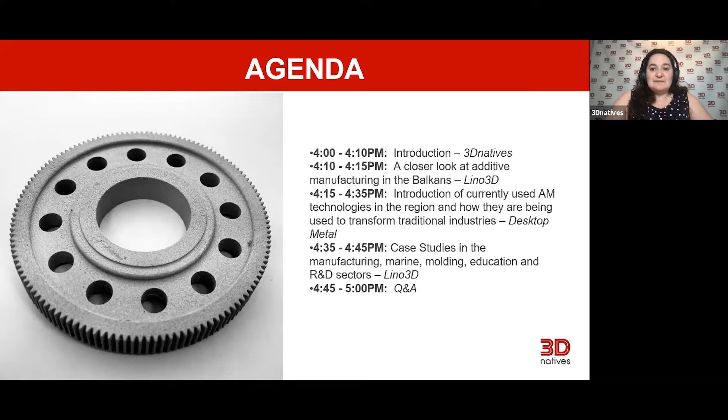So let's go to the next slide. For those of you who don't know, there can be some disagreement about which countries are considered Balkan. The general consensus right now is that it is made up of Albania, Bosnia and Herzegovina, Bulgaria, Croatia, Kosovo, Montenegro, North Macedonia, Romania, Serbia, and Slovenia, as well as Greece and Turkey. This is what we refer to as the Balkans region, also sometimes as Southeast Europe. You'll hear both used interchangeably.

Traditionally, industry in the Balkans has been centered around sectors like manufacturing and the maritime sector, unsurprisingly. Though, of course, that's not exhaustive - there are quite a lot of sectors in the area.

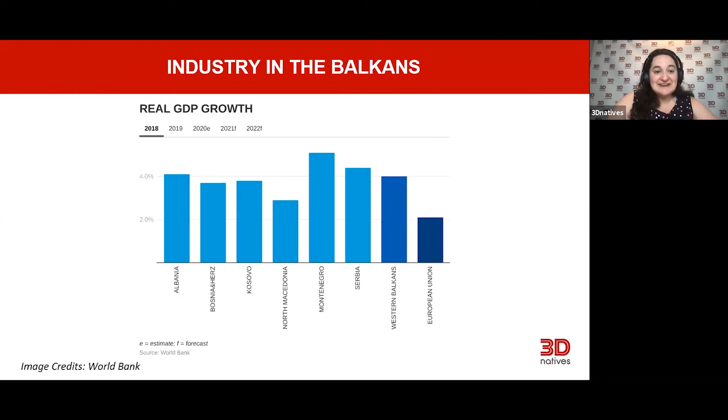I think most of you are in AM, so you are aware, but additive manufacturing has also been growing significantly in recent years. It is one of the few industries which was affected, but not too much, by the pandemic last year - one of the few that continued to grow despite the economic crisis caused by COVID-19. And it is expected to continue to grow in coming years.

There are a number of different AM technologies in a number of sectors, but it is expected to become especially important in the Balkans because of traditional manufacturing in the region, especially with metal, and it's expected to help cut costs and save on efficiency, helping the Balkans to grow even faster.

So next slide, please. Now you've listened a little bit about the Balkans, and we will get into it more. Let me introduce the panelists.

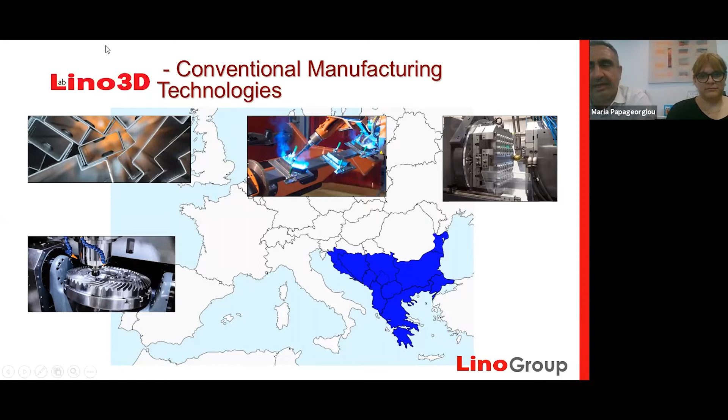The reason additive manufacturing is going to be a change in the Balkan countries, offering alternatives to conventional technologies like everywhere in the world, is the fact that this is an additive and not a conventional manufacturing method. So to create the final part, you don't use a bigger part and make waste out of it, but you have as little waste as possible to create the final part.

There are many pros to using additive manufacturing, like shorter production time or reduced material waste compared to traditional manufacturing. It's also much cheaper to make prototypes compared to the expensive prototyping with traditional manufacturing, including the labor cost and resources you have to invest.

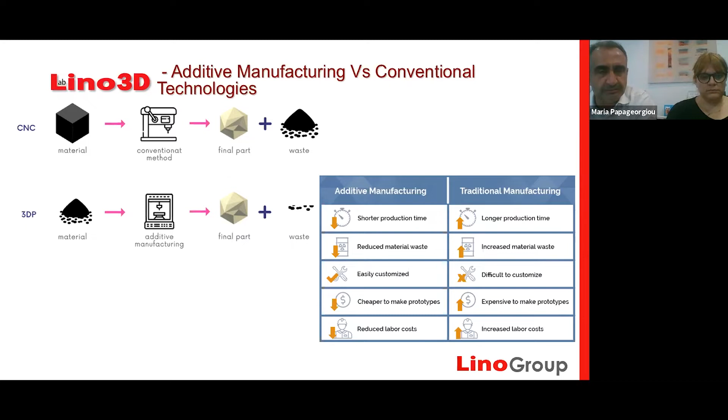So in general, additive manufacturing is a technology that came not only to produce prototypes, but also for short or medium run production. Now, Lino 3D is a 3D printing lab which seeks and adapts all additive manufacturing edge technologies. With our expert personnel and fully equipped facilities in Athens, we want to serve and support the Balkan manufacturers.

We help them in their process, to choose the right additive manufacturing process, the right additive manufacturing materials, and of course acquire the necessary skills to understand the stakes and the functioning of 3D printing technologies.

We are currently based in Athens, but we master a lot of different 3D printing technologies like nanoparticle jetting, SLA, and Desktop Metal's binder jetting technologies.

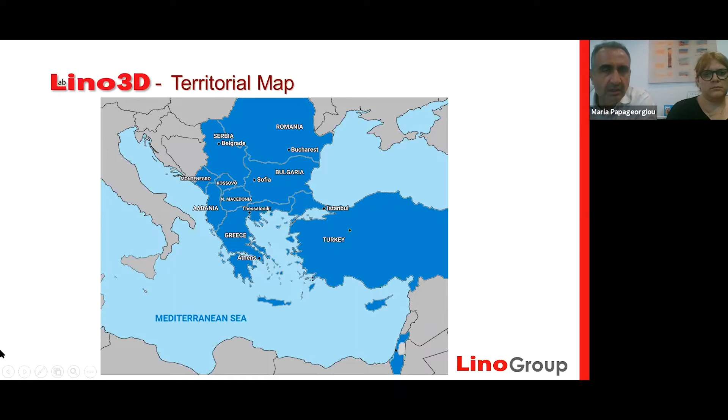This is the panorama of our distribution partners for 3D printing, offering different technologies and materials for different applications. For example, for plastic materials, we use SLS, SLA, DLP, and FDM technologies, and not to forget the full color UV 3D printing technology.

For metal materials, we use FFF, but also the newest binder jetting technology. However, we also use ceramic, where we use nanoparticle jetting technology. Nevertheless, we also use gel dispensing printing technology with Massivit for extra large additive manufacturing scale.

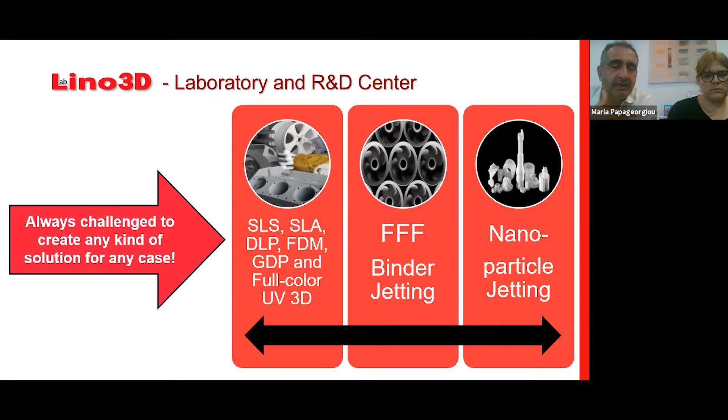So the challenge that we have with all these technologies and materials is to create really any kind of solution for any case that can appear for us in the Balkan areas.

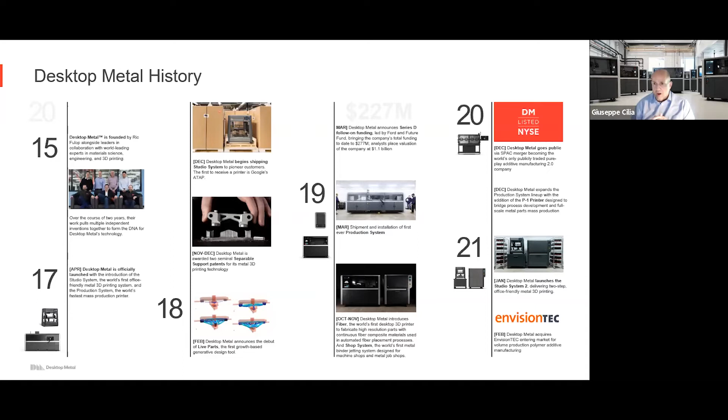The market verticals covered are very different, from fashion to automotive, passing through medical device companies and educational institutes. This is a technology that can fit tremendously the requests typical of a region like the Balkans.

This is the coverage. As you can see, we are present in Europe, and especially in the Balkans in this case.

Why the Balkans? Because for us this is really a strategic area in which we are absolutely convinced our technologies can make the difference, changing the way companies in this region do business, and that can have an impact on the economy too, as previously mentioned by Madeleine.

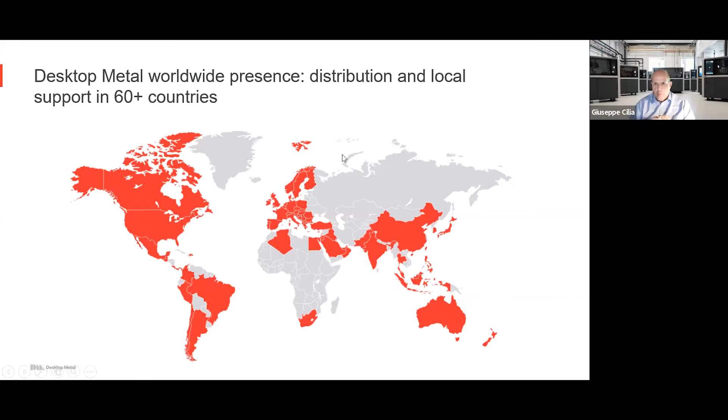The very interesting thing is that, as mentioned earlier by Madeleine, this confirms there is strong awareness in this region about additive layer manufacturing technology. Now with Desktop Metal, we have the chance to propose additive manufacturing not only for rapid prototyping, the historical application, but most importantly, and this is why Desktop Metal is pushing in this region, for production systems.

Production system means the capability to run mid-volume production up to high-volume production, as Carlo will describe in the next minutes. So I won't spoil or anticipate anything, I'll let Carlo explain in much more detail the technology and why it can help the discrete manufacturing industry in the Balkans.

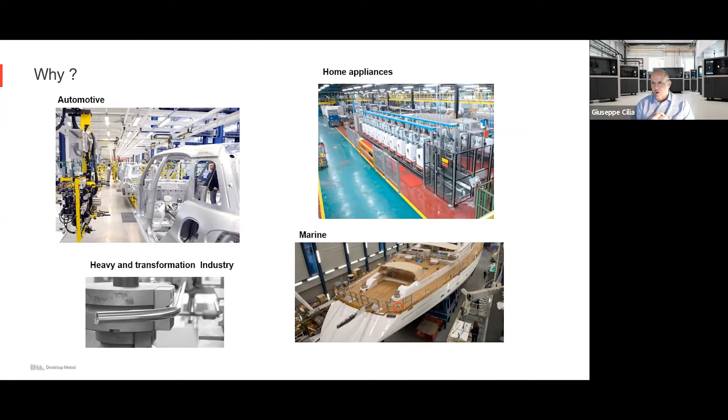Our main goal at Desktop Metal is to leverage additive manufacturing technologies, and I will show you later what kind of technologies we are working with, to create a path to tooling-free manufacturing.

What does tooling-free manufacturing mean? You can see in this slide a lot of different standard and conventional manufacturing technologies explained in terms of product complexity and the volumes that can be produced.

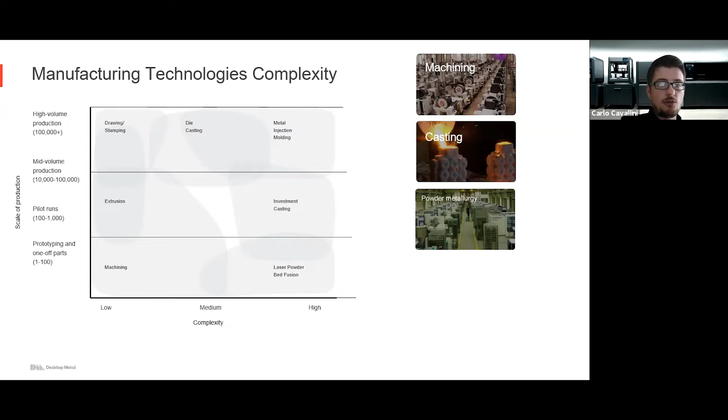There is a common background that applies to all conventional technologies: you need tools. That means you need to develop your tools, which involves long lead times and allows fewer design iterations. A lot of the time you need to sacrifice complexity, performance, and design features in front of manufacturing cost and technical limitations. So everything drives toward increased production cost and longer manufacturing time to market, as well as longer lead time.

If you look at this slide, there's a quick overview of the typical time to market, not lead time, time to market, meaning the time required to industrialize a new part number for the first time. Comparing standard manufacturing solutions like machining, casting, MIM, and finally the best one, binder jetting, which is our technology, you can clearly see the power of additive manufacturing, especially binder jetting, because you save a lot of time in manufacturing time to market.

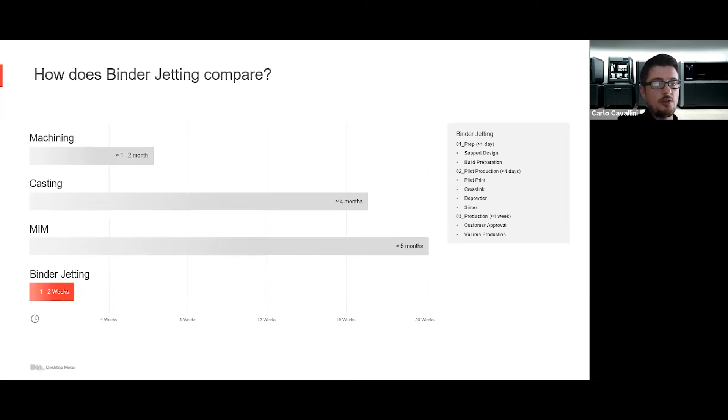This lets you increase the number of iterations to optimize your design and push your product's performance to an optimal level. At the same time, you can be as fast as possible to market, creating a competitive advantage against your standard competitors.

So actually, all these goals related to the reduction of time to market, and sometimes manufacturing cost, can be achieved by the general world of additive manufacturing.

If you consider specifically metal additive manufacturing, the standard technologies, for example laser beam powder bed fusion, we can say that such technology is not really able to create serial manufacturing opportunities, because the productivity is still really low. At the same time, it's not able to create a lot of prototyping opportunities because the technology is still really complex and really expensive.

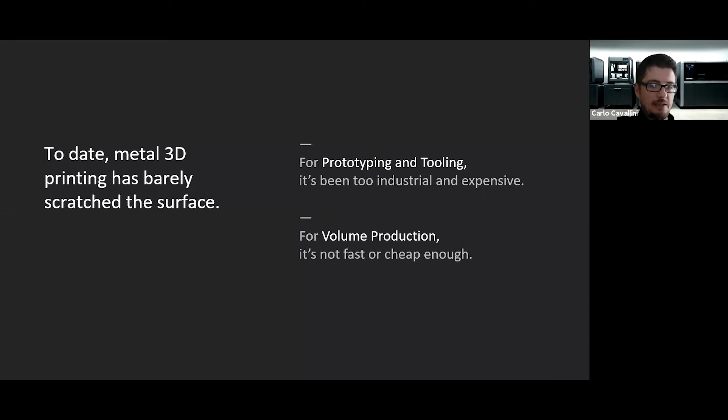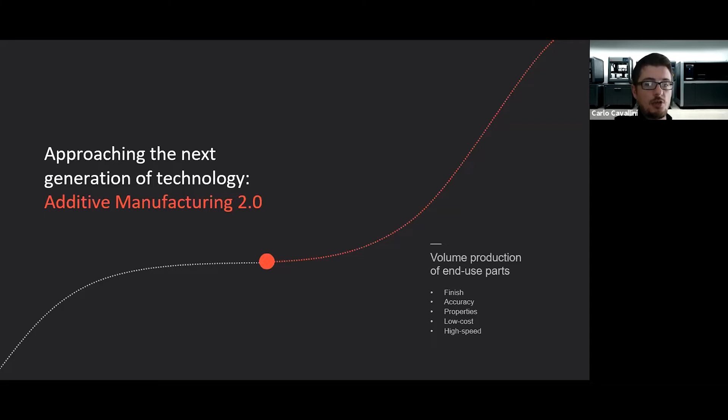So what is the basic idea of Desktop Metal? It is to change completely the scenario for metal additive manufacturing — to create metal additive manufacturing 2.0. This means cutting dramatically the manufacturing cost using metal additive manufacturing on one side, and creating much more user-friendly technologies.

This means metal additive manufacturing 2.0 for Desktop Metal.

As you may be aware, Desktop Metal is currently working on a couple of different, pretty similar technologies with metal. The first one is bound metal deposition, based on the standard background of fused filament fabrication. It's a really user-friendly, office-friendly technology. You don't need too much technical background compared to fused filament fabrication to be able to manage such technology, and you are able to create pretty complex prototypes in really short time.

On the other side, there is binder jetting. Binder jetting is a really full production technology based on powder bed solution, where you spread a specific binder able to solidify powder and create your green part, which will go in a furnace to run the complete sintering cycle. So it's a different technology for a different application: bound metal for prototype, binder jet for serial production.

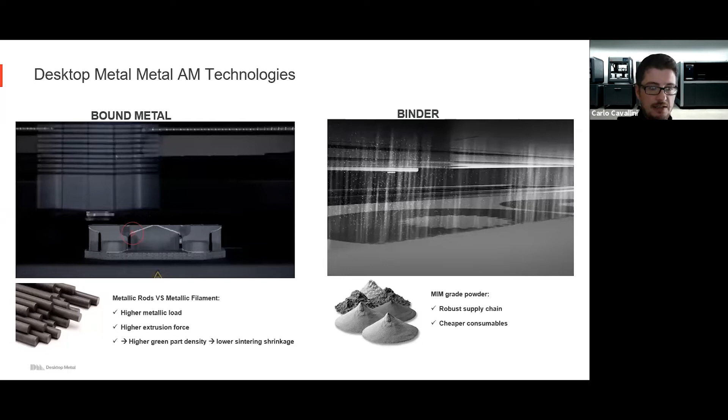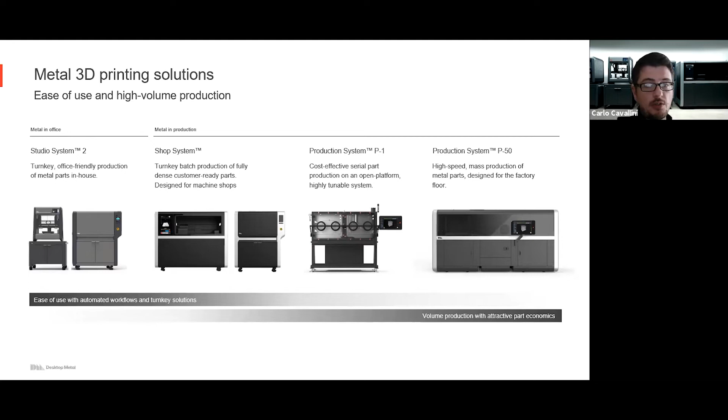So here you can see the full offer from Desktop Metal's different systems: from the real office-friendly Studio system, through small batch production with the Shop system based on binder jet, then moving to real serial production with the Production System P1, and the top end of our portfolio represented by the Production System.

If you remember the map I showed a few slides before with the different technologies, you can see how our products position on different segments in terms of production scale — starting from pure prototyping with the Studio system, moving through medium volume production with the Shop and the P1, and finally real serial production, thousands of parts each week, with the Production P50 model.

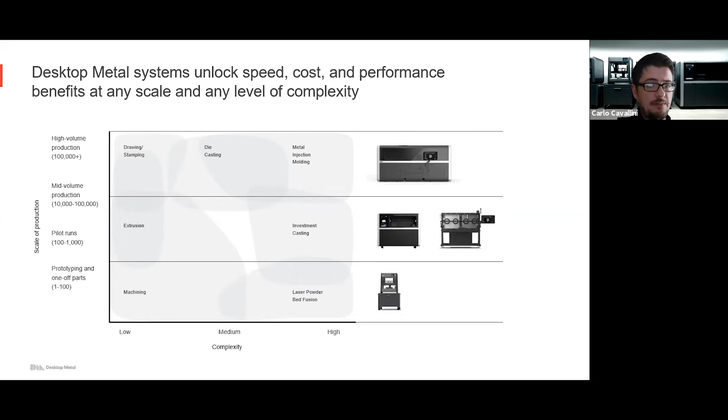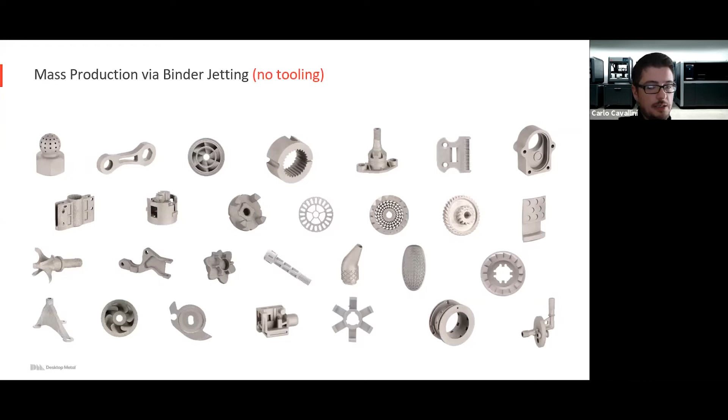So really a quick jump into a couple of our main systems, starting from the Studio 2.

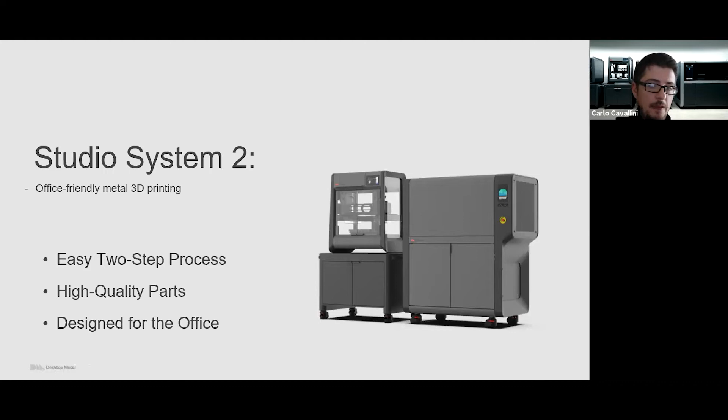This is a technology based on fused filament fabrication. You start by extruding a filament to create your green part, like a standard MIM process. You move through the sintering phase where all the metal particles are welded together. Finally, you can remove all your parts really easily, because we have patented a specific technology able to let the support be removed much more easily than standard laser beam powder bed fusion technology. As you can see from the video, it's a question of seconds, not hours, like laser beam powder bed fusion.

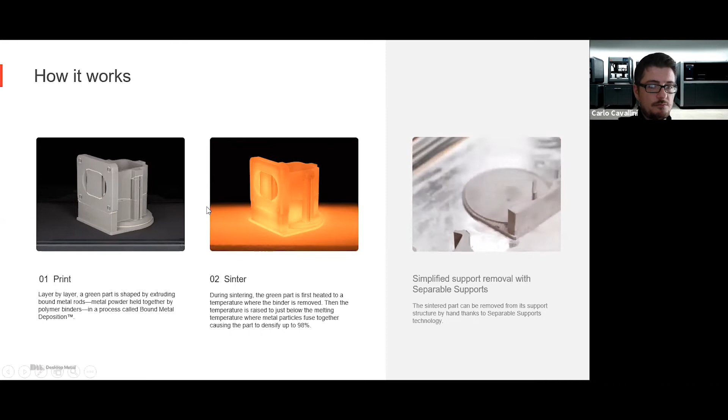Can you move? Okay, perfect. Maybe too much. Okay, so I'll explain this one.

I've explained a lot of advantages of our technology. It's user friendly, the material quality is really good, it's compliant with standard MIM specification. You can put this machine into your office or technical office to iterate really quickly, with lots of prototypes to optimize your design.

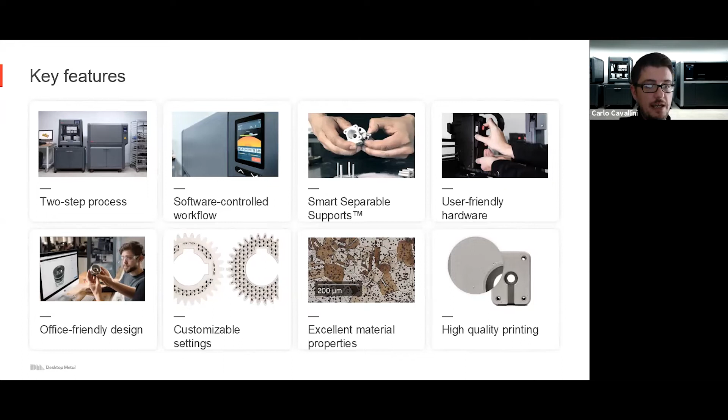Again, a lot of different parts can be made by different materials. Really interesting, with fused bound metal deposition you can also use copper, which is pretty interesting considering electrification and electronic applications. But also a lot of different materials, like different grades of steel, case hardening steels, and stainless steel grades.

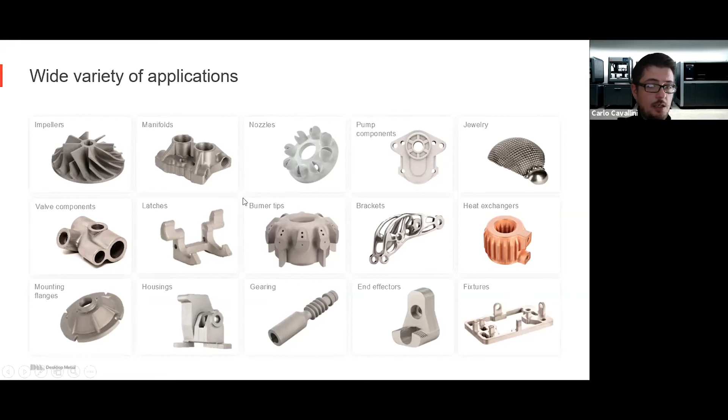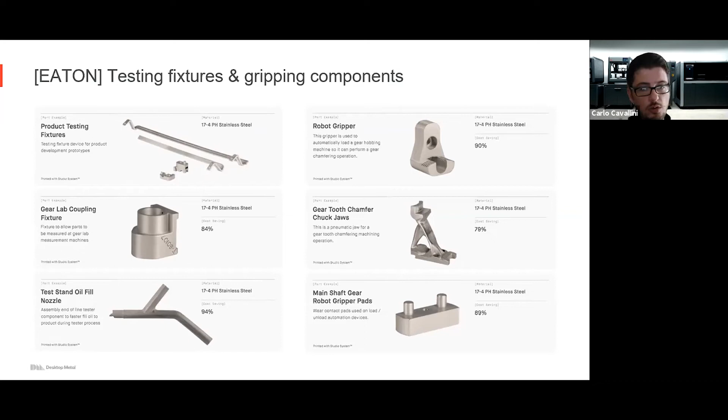Here you can find some examples of the complexity you can achieve with this kind of technology. As Madeleine said, this webinar will be recorded and available on YouTube, so I don't want to take too much time explaining all the details, but the most important thing is the saving in terms of lead time—you can save from 30 to 80% of lead time.

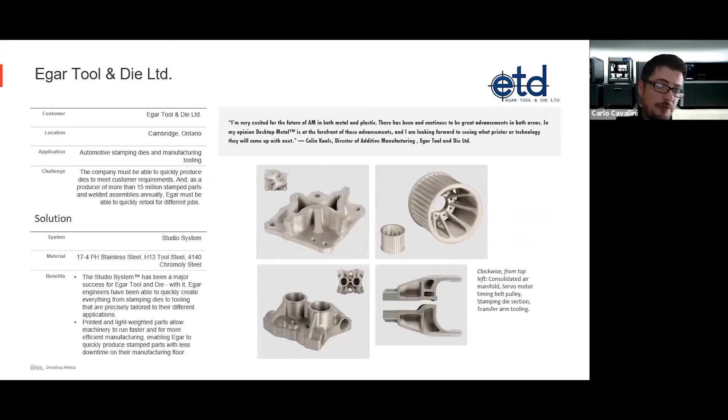And now we can jump into binder jet. As I said, binder jet is a completely different technology, based on the deposition of a selective binder onto a powder bed made by metallic powder. This can leverage a lot of different features. First of all, if you compare it to laser beam powder bed fusion, here you have a fully isotropic material, and really higher throughput because this is not a vector-based technology, it's a raster-based technology.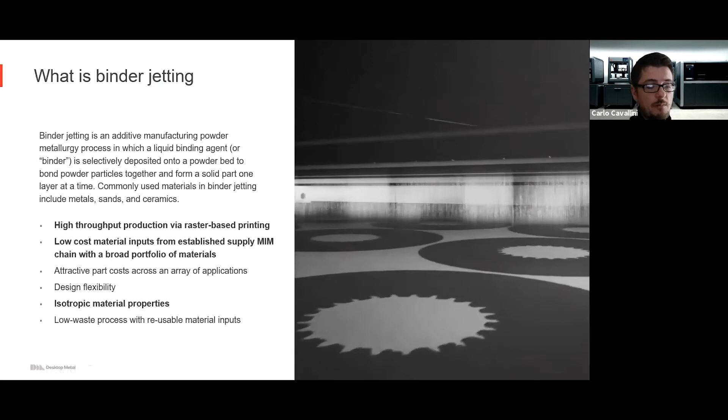And you can use cheaper material because you can use almost the same powder as MIM. So a lot of advantages compared to standard metallic powder bed fusion technologies.

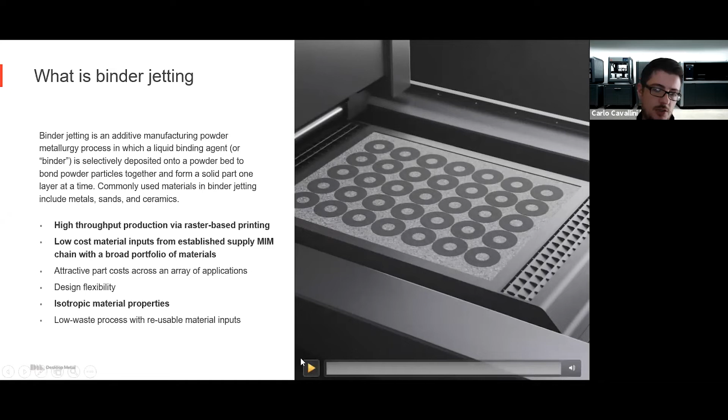Especially our specific machines are able to save time compared to competitors in binder jet, because we are able to integrate different phases of the full process into the same phase. So it's itself quicker than laser beam powder bed fusion, but Desktop Metal binder jet is much quicker because it smartly integrates different passages of the process in the same phase.

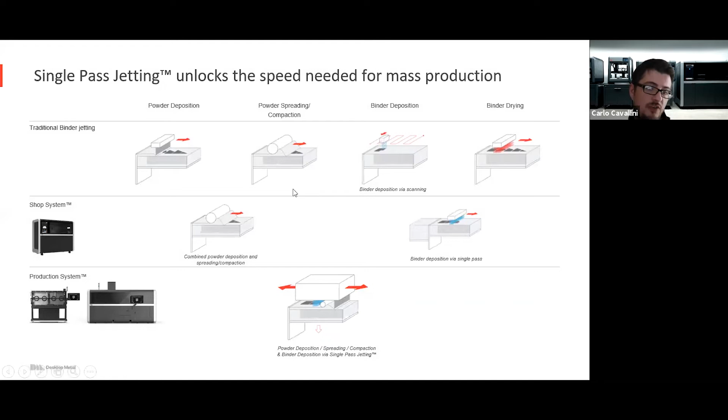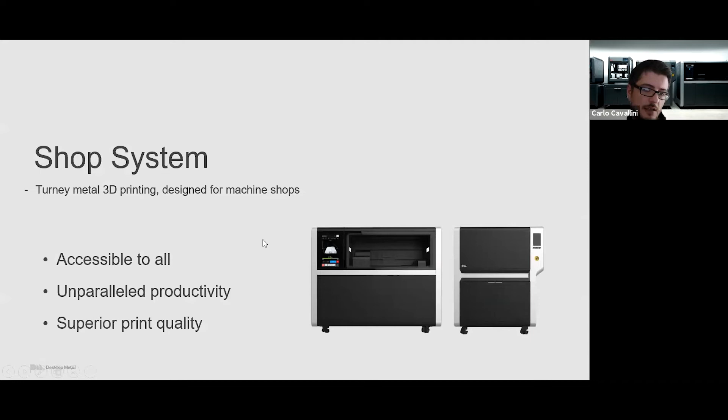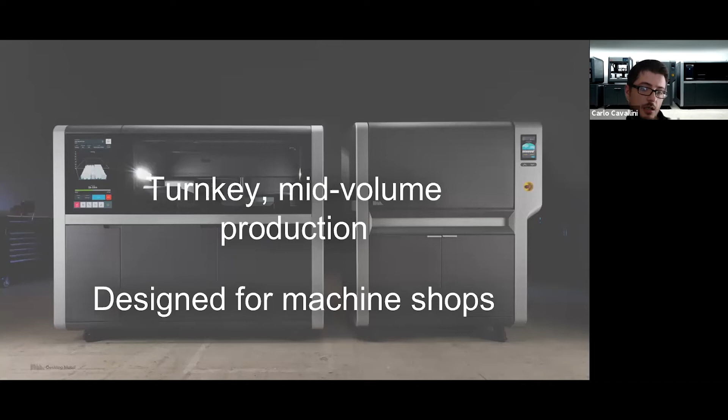This is our shop system. This is specifically developed for mid-volume production and shop floor production, with 3 basic modules: the printer, the depowder, and the sintering furnace.

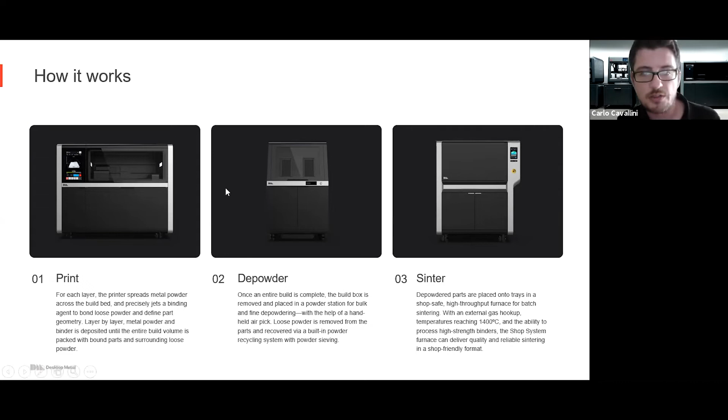I'll explain how this system works later, so let's move on since there's a lot to cover. Again, you can use this system for mixed volume batch production, or real full series production with the same machine in the same job.

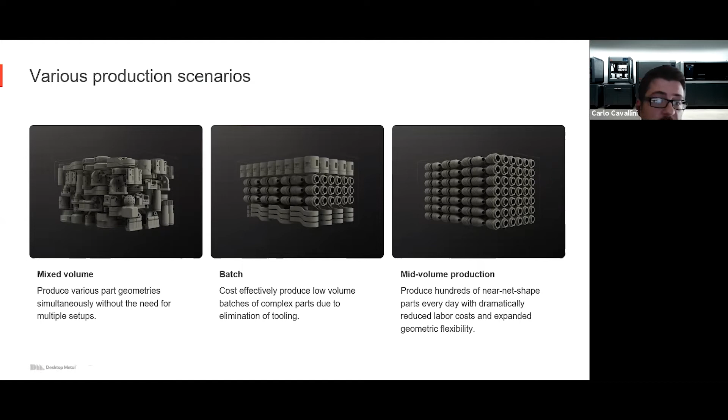These are the main features of the machine. It's a really user-friendly machine—you can install it almost in an office, but it's probably better to put it on the shop floor. Again, you can produce a lot of parts with a lot of complexity at the same time.

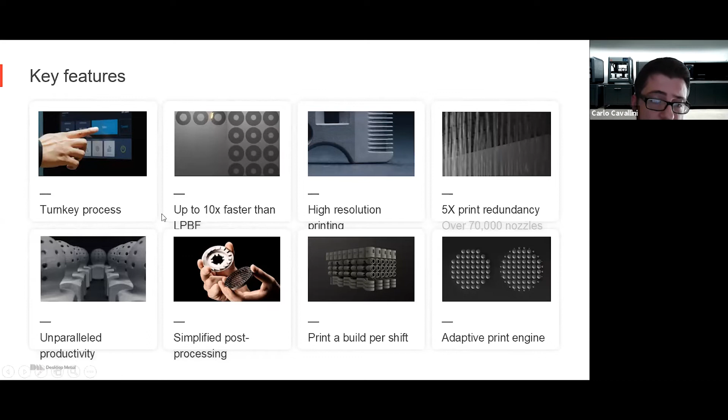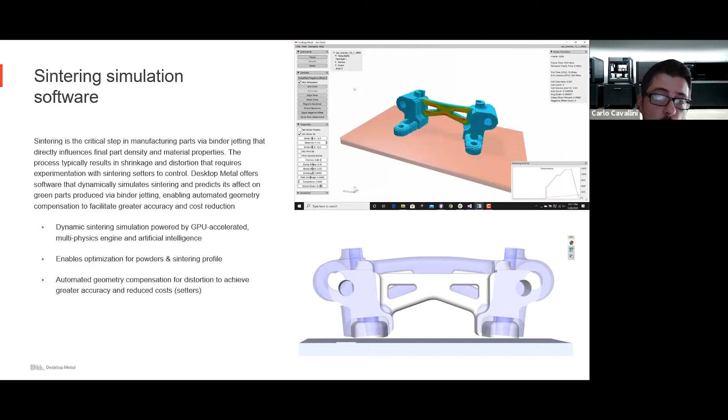This is a really interesting and mostly exclusive solution provided by Desktop Metal: we are able to simulate the full production. This lets you cut a lot of prototyping time required to create the optimal industrialization for your part, since everything can be simulated on your computer.

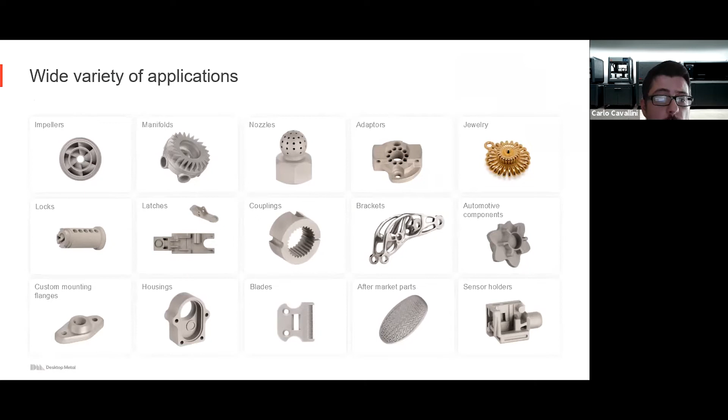This is the standard complexity you can achieve with the shop system. Mainly we are working with steels, different grades, but in the near future we will be able to integrate nickel-based alloys and cobalt chrome as well.

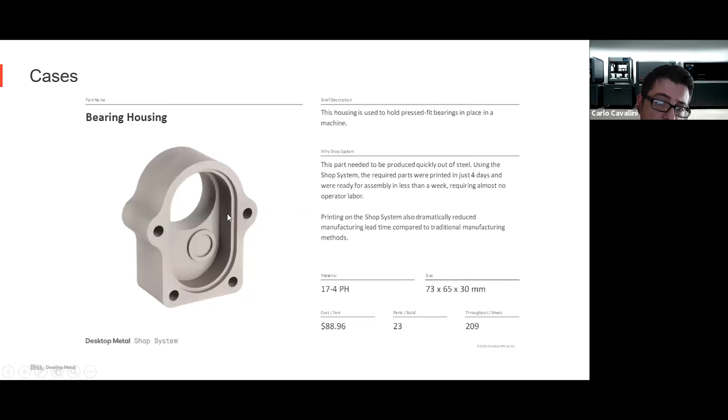Some examples: a clutch plate, a bearing housing—all made by 17-4 PH steel—and here an hot air nozzle, again 17-4 PH steel. You can save really a lot of lead time.

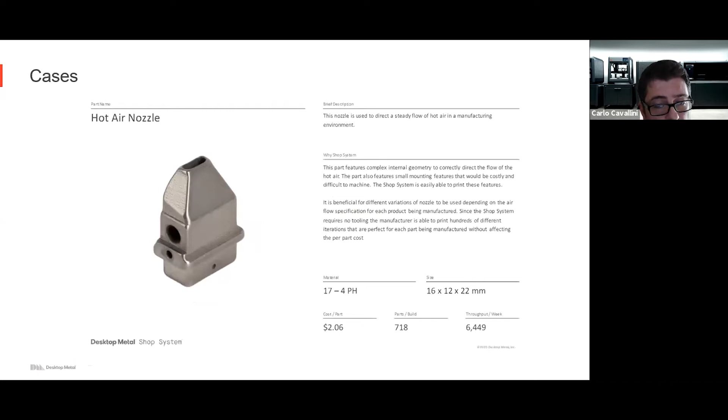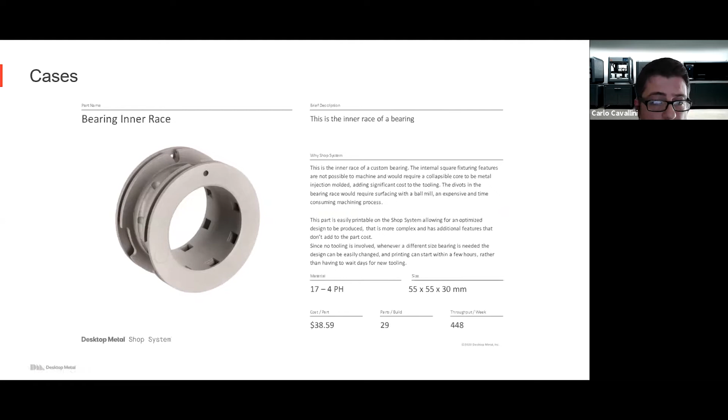You can increase your production throughput, cutting a lot of lead time with the Desktop Metal shop system, and optimize your design. This is really the last one, one minute and I will finalize.

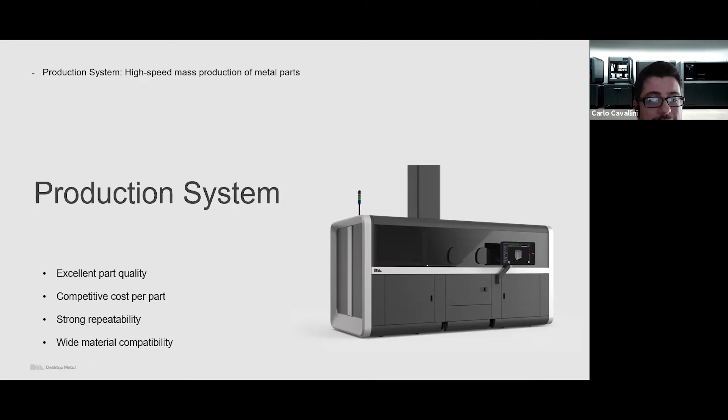This will be the next step of productivity. You will be able to produce hundreds and thousands of parts each day.

This is a system developed for real serial production. Here you can see the main features—this system will be available starting from next week, and it will be a completely automatic system, so almost no contact by operators.

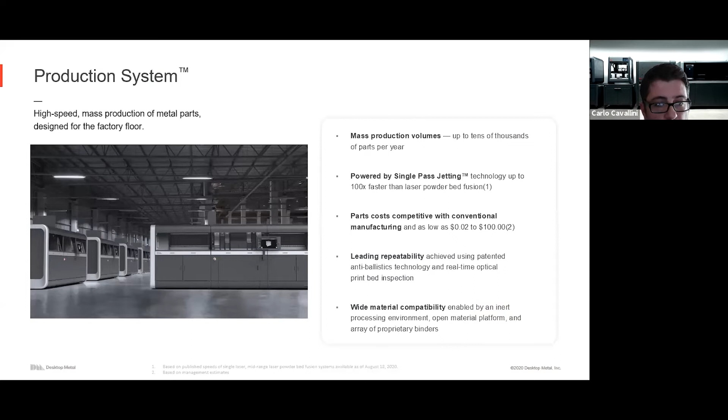You will find 2 different systems: the production system P1 that is not yet available on the market, and the real production system P50. One main important feature of P1 and P50 is related to the fact that they are able to work under inert atmosphere. So you will be able to manage reactive materials like aluminum, titanium, precious materials, and so on.

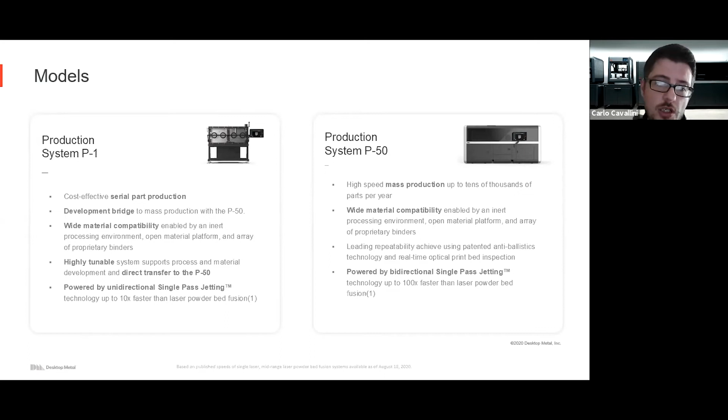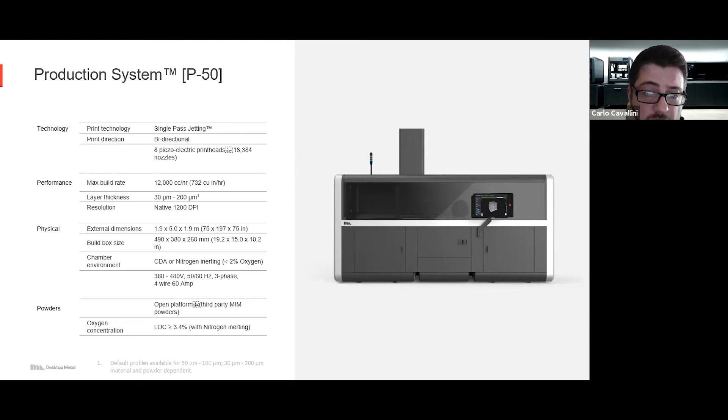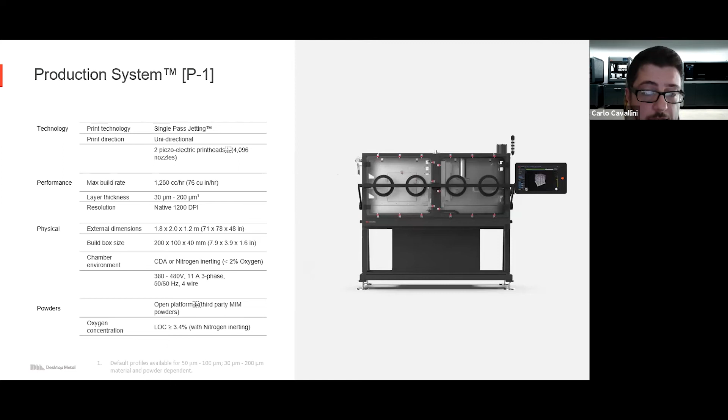These are the main features of the machines. You will be able to read from our recorded webinar about the P50 and the P1, more related to research and development for serial production. Again, real inert atmosphere. And that's all, sorry to be a little bit late, but there were a lot of details to share really quickly.

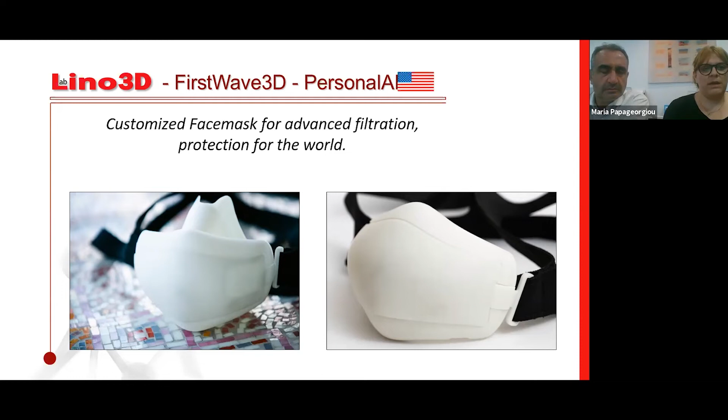The customer, FirstWave3D, had a series of demands and managed to find all of them in the Balkans, specifically in Lino 3D. We can summarize all of the demands here, listed here.

The first step was rapid prototyping, a procedure that requires accuracy and fine surface finish for the first prototypes. Next step is functional prototyping, a procedure which requires, besides accuracy and fine surface finish, biocompatible materials and, of course, snap fit assembly in order to be placed on the face.

Next steps were rapid manufacturing and short run production, procedures which require not only accuracy, fine surface finish, and biocompatible materials, but also taking into consideration the volume of the printing. All of these demands were successfully answered with EnvisionTEC's DLP technology.

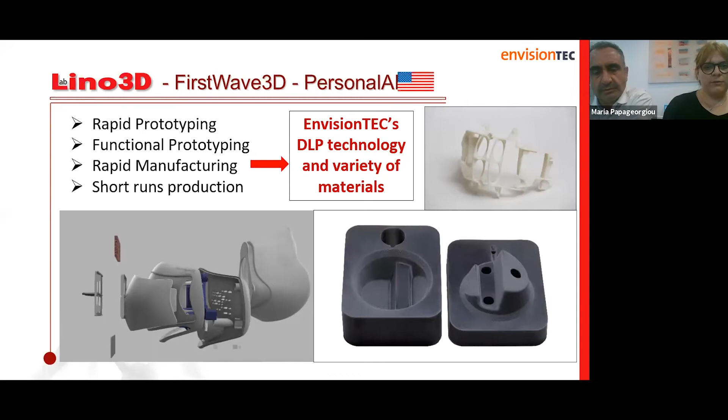You can see here some of our examples. Here is the assembly of the mask, the snap fit of the mask, and here is a kind of insert made with plastic from EnvisionTEC DLP technology.

The last demand from the customer after successful prototyping was to move on to massive production. That's when Desktop Metal and binder jetting technology proved its value. We produced metal inserts, you can see two examples here, with the Shop System from Desktop Metal, the machine that Carlo showed before, allowing us to move on to massive production with this versioning.

This was a very important step, responding successfully to accuracy, surface finish, and snap fit assembly with large volume production. We managed to develop basic, standard, and advanced versions of face masks, and the advanced version also has printed ceramic filters in it.

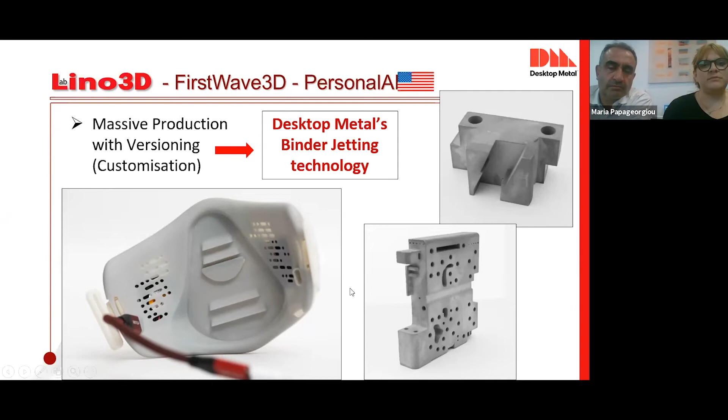Let's move to the next case study. Our next case study was in the field of education with CERTH, the Center for Research and Technology Hellas, in the Balkans, located in northern Greece. We took part in a program to promote and show education sectors how additive manufacturing can be emerging as a key technology for design and manufacturing.

We printed all of this stuff in order to give the students the opportunity to learn and connect with new technologies, new 3D technologies with metal, and through the actual fabrication of the parts, to enable them to develop parts that could not be achievable with traditional manufacturing methods.

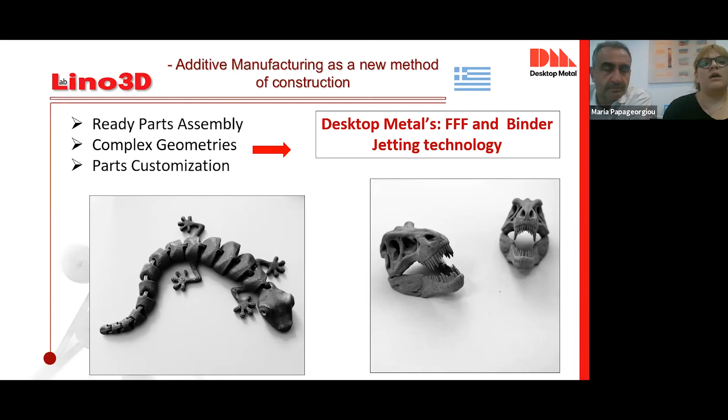Our last case study is in the marine sector. It is widely known that for centuries in the Balkans, the marine industry has been widespread and traditional, and countries like Greece, Croatia, and Slovenia have it in a very high percentage.

As we know, marine engines of all kinds and sizes keep developing through time and through technology evolution. However, there are parts of a lot of engines and transmission parts that are not produced anymore, and they are considered obsolete.

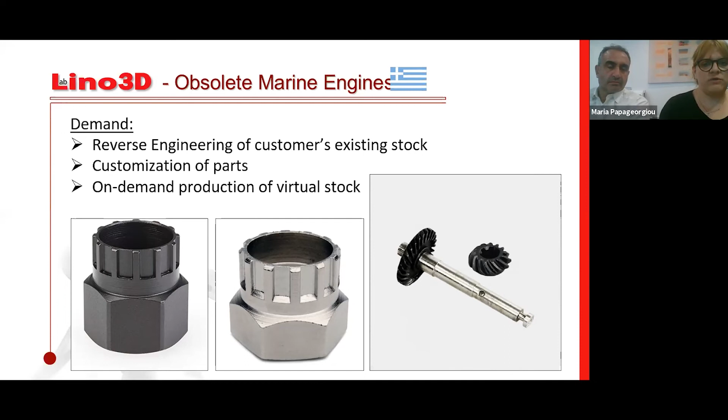We can see here some of the parts we printed with desktop metal binder jetting technology, Shop System, and we met the customer's requirement fully with this kind of technology. We responded successfully to accuracy and snap fit assembly in the final results. Thank you.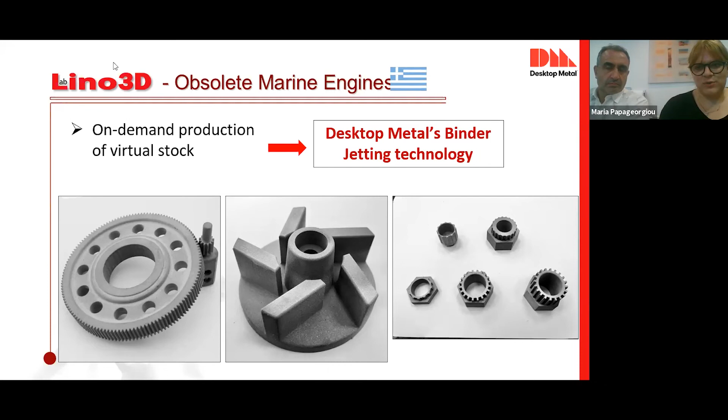That was all from me. I don't know, I finished a little earlier, I don't know. No, we're perfectly on time. Great, well, thank you very much, everyone.

That was really interesting, especially the case studies, seeing how it's already being used in the Balkans. I think it's especially interesting how there is a case of something that's being used in the US by a US company, but being made in the Balkans. That's really showing how it's revolutionizing the area, isn't it?

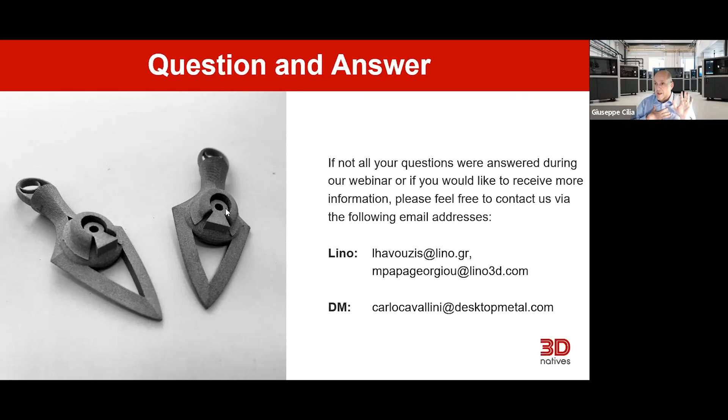For example, translating the answer to other technologies like casting metal parts, rather than CNC machining, we have the same problem. One can purchase a small mill, a small lathe, with just a few euros, say 1,000 euros, and produce almost everything. So it's up to Carlo now whether we have some filter in the software application to prevent some shapes, but it's very, very difficult—if I understood correctly the question, of course.

I was excited to participate in Defense Expo yesterday and the day before in Greece, where a lot of military visitors were asking how 3D printing can affect the construction of a gun or things that terrorism or others may use. So the answer is as simple as that: we cannot prevent it, because anyone who has this technology can print based on the STL file, whatever he wants. So this is actually a way of construction, and if you want to construct something dangerous, you can. I suppose the most important thing is how to protect the STL files containing this information from printing, not the production itself.